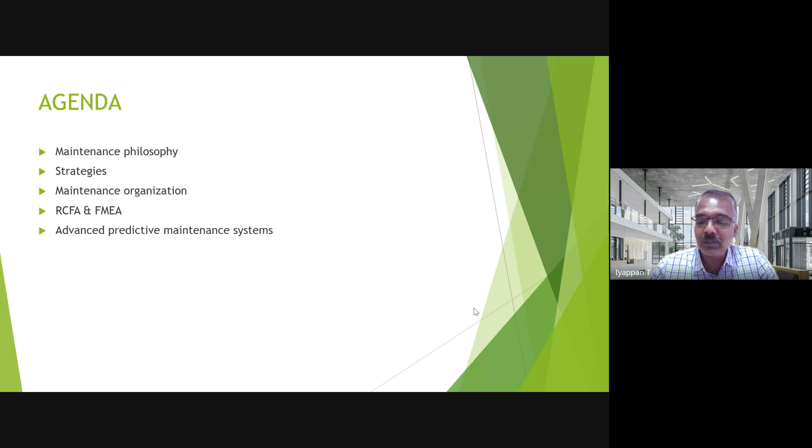And in this digitalization era, we have so many advancements in technologies, so that has also impacted the maintenance systems. So we have this advanced predictive maintenance systems. I'll continue with the presentation.

In case of any questions, I request our students to keep it, and then at the end I will answer all your questions. So what is maintenance?

Basically, maintenance is to upkeep the healthy condition of any machinery or rotating equipment, or for that matter any equipment. This is broadly divided into three categories.

Inspection, to know what is the actual state of that equipment or machinery. And then service is to maintain some parts, replace some small parts, repair something, or do some lubrication, which is also a kind of service to keep the healthy condition.

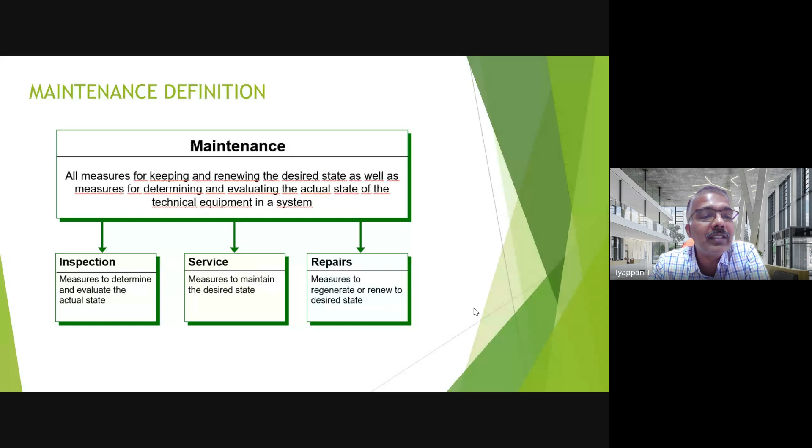After a certain period of time, we might have to do a major replacement or a shutdown to renew the lifetime of that equipment, to enhance the lifetime. So maintenance in general is inspection, service and repairs.

So how it is done? For example, if you have any equipment in the industry, then first thing is after operating it for some time, we need to inspect it.

There are two kinds of inspections, online and offline. During working of the machinery we can measure some parameters, and sometimes we take the machine to a shut-off condition and then measure some parameters, do some inspections. We will cover those details in the later slides. So this forms the part of inspection.

Then after inspection, we find some deviation or abnormalities. Then we have to plan for the correction. So planning is the first step. Planning includes manpower planning, the resources, as well as the spare parts, then the timeline of when we will do that job. So this is the planning task.

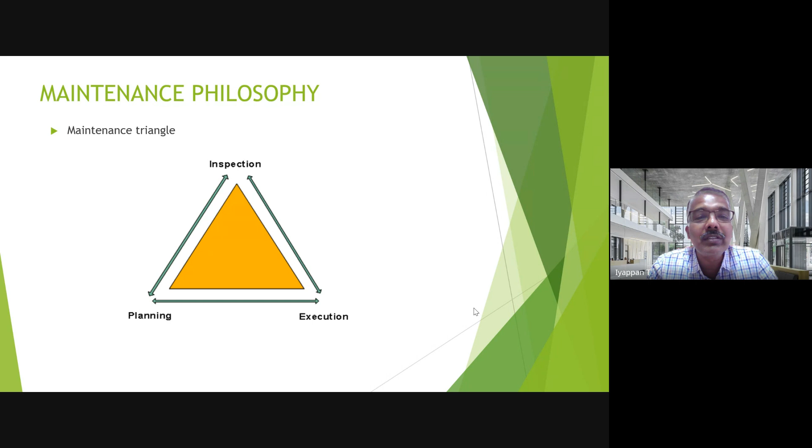Then third comes the real execution. We execute that planned activity. So why we put an arrow mark back and forth is because all these three activities, three functions, are interrelated. That means it cannot work in compartmental modes. One has to be connected with others. So the engineers assigned with the planning task have to coordinate with the inspectors as well as the execution engineers. So maintenance is always said to be in a triangle covering broadly these three functions.

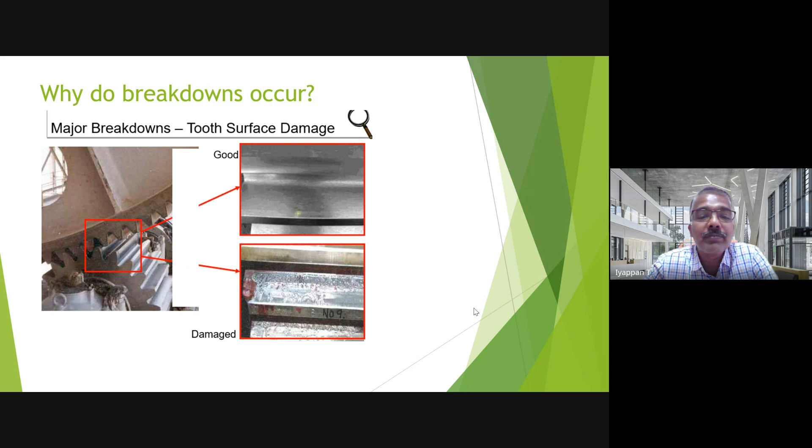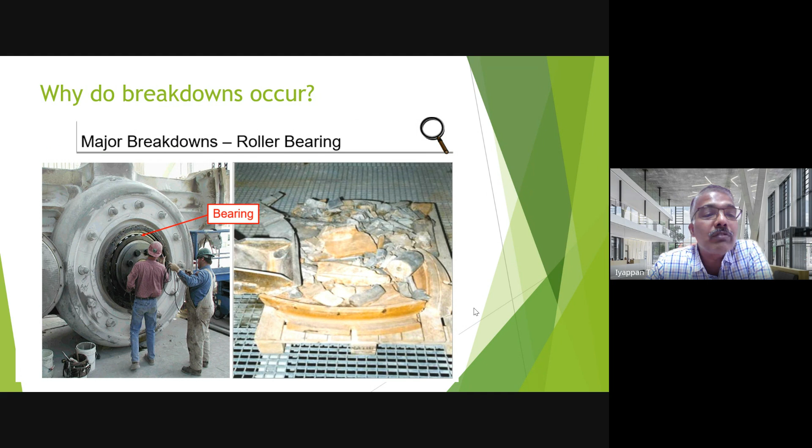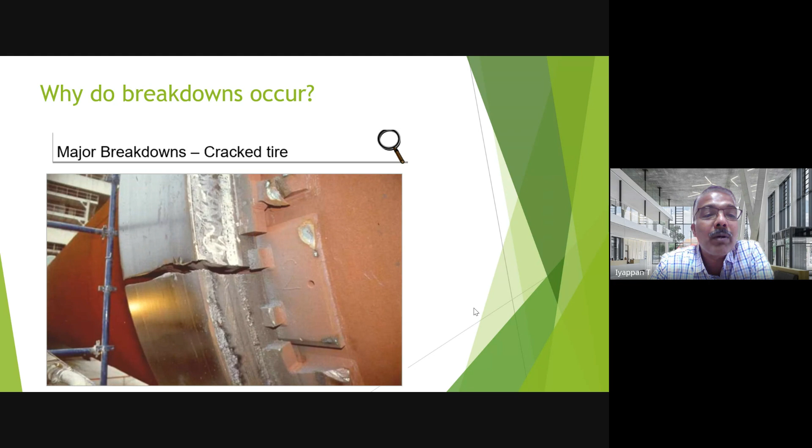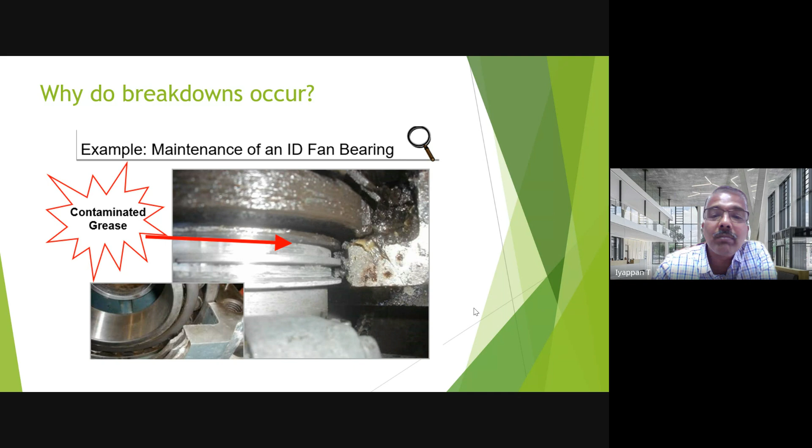Here for some bearings, we see the grease is contaminated. The ID fan, induced draft fan, is a very common equipment used in all process industries. If you use contaminated grease, the bearing could fail, or the contamination could happen from dust. This picture shows a bearing without adequate lubricant, with no sufficient lubrication. So what does it mean?

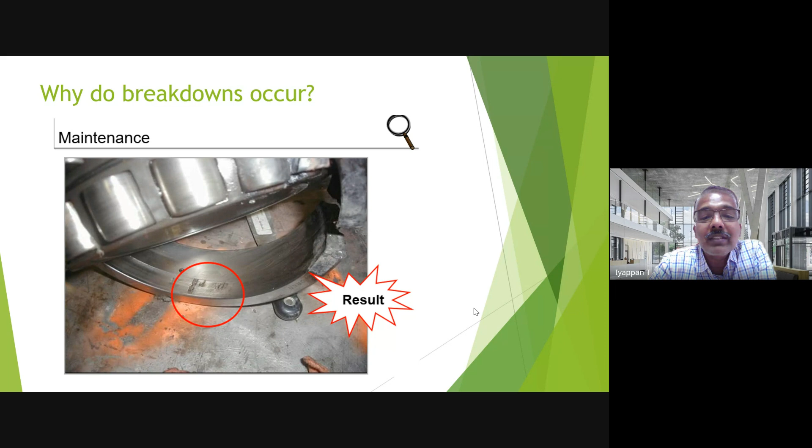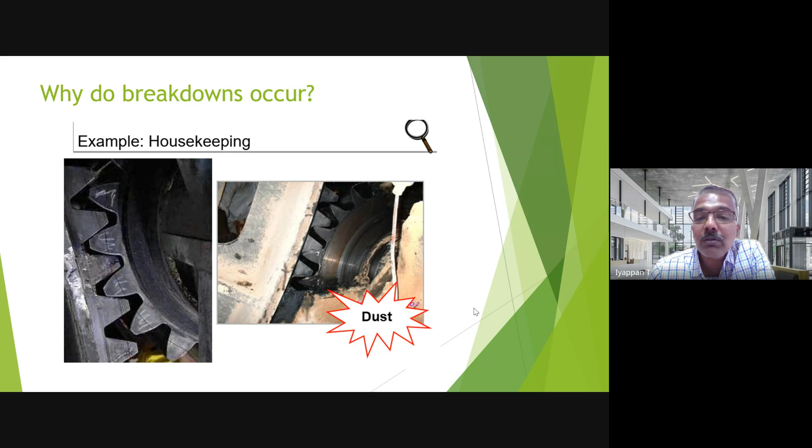Poor housekeeping also leads to equipment failures. So when you think about why these breakdowns occur, we get an answer. There are four broad categories. Why do such machineries, which are well designed for a certain lifetime, why does it fail?

First one is about design and manufacturing of equipment. Many times the problem could happen due to a poor design or even lack of quality control during manufacturing, causing it to fail, like what we have seen in the previous few photographs. Or if you are operating the equipment beyond its designed limit, basically overloading it, operating beyond the factor of safety, then also it could fail.

But today's agenda is not about these first two things. We are not going to discuss much about design and operating limits. We focus clearly on maintenance.

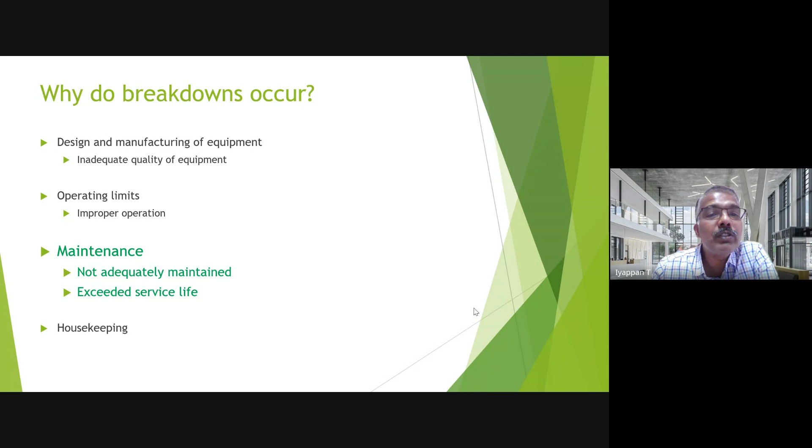Machine breakdowns occur based on statistics. More than 60% of the cases are related to maintenance. So the other two categories broadly account for less than 40%. Mainly maintenance, or lack of adequate maintenance, leads to more than 60% of equipment failures in any plant or industry. Housekeeping is also considered part of maintenance. So these two categories severely influence the equipment breakdowns we have seen in previous slides.

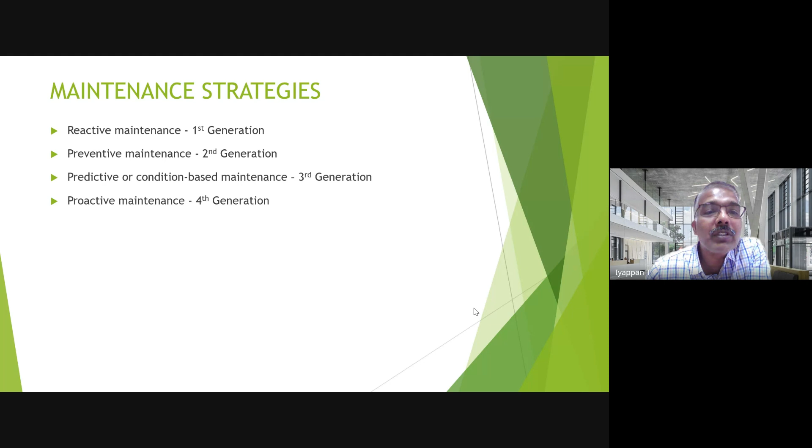So we see in the subsequent slides why. As the name suggests, reactive means you have a machine and you run it until it fails. You don't even bother to go inspect it. It's a firefighting approach. One day the machine fails, then you get a call, go and repair it, replace the parts that are broken or worn out.

When you talk about maintenance, you should be very clear about planned stoppage versus unplanned stoppage. Planned stoppage means we stop the plant or equipment to do maintenance, repair, or service - this is not counted as a breakdown or failure. We plan this when market demand is less, or when we have sufficient storage in the warehouse. Mostly we focus on unplanned stoppages, which are termed breakdowns.

If you follow this reactive maintenance strategy, you will end up with unplanned stoppages when your market demand is at a high peak season. Labor costs may increase because breakdowns may happen anytime and you may have to attend to them immediately, so you cannot plan the workforce. Repair and replacement costs would be higher because you would not know what component of the machine will fail - it will be a surprise. So you may have to purchase that part if you don't have it readily in inventory.

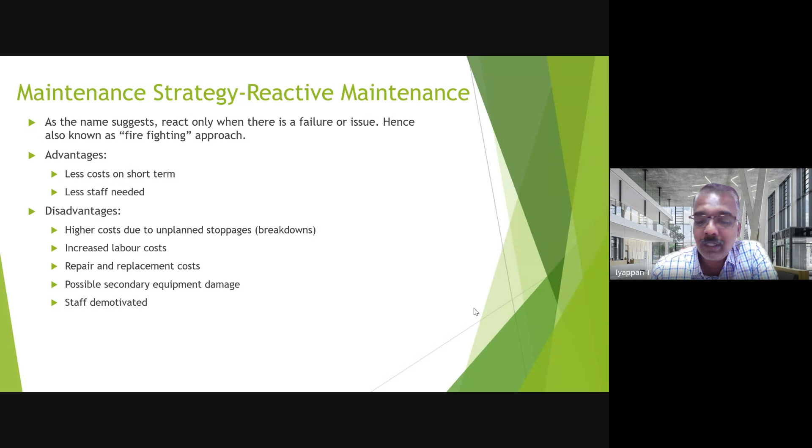So reactive maintenance is never ever recommended in these days. It was a very olden day structure. Why I bring it up here is so you should know the generation, how it has transformed.

Most plants or industries have started following preventive maintenance for several decades now. Preventive maintenance means we do some inspections in a preventive way. We stop the equipment on a planned timeline, and then we check the condition of the equipment. I have some examples which I will show later.

So we check the equipment for certain conditions. If parts have to be changed, then we replace those parts time to time. We schedule it. For example, if there is some equipment which needs an inspection every month, then every month we stop it for 8 hours, probably on a day where we don't have a big market season or where it is not affecting your business plan, and then we do a repair.

This has got certain advantages over reactive maintenance, and you can definitely reduce your unplanned downtime because the equipment will not give you any surprises. It will give you an early indication of what kind of failure is going to come in the next few months, next year, or in the next few days, so you can plan your repair accordingly. So preventive maintenance is a much better option than a reactive one.

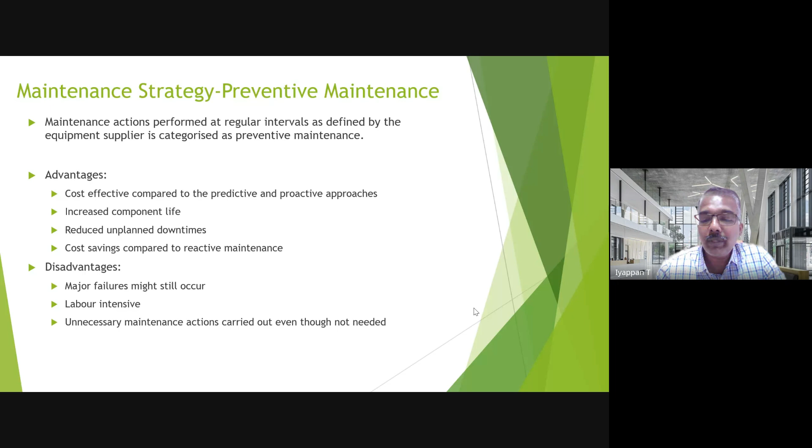So this is how you have to think about the strategy to balance it. If you are thinking of removing all the issues at a time, then it may land up in higher cost. So there comes budgeting - maintenance budgeting - which is altogether a different subject. If you want to optimize your maintenance budget, you try to attend to the issue which is highly critical. For example, if the issue will damage the equipment or stop your production, you may have to attend to that highly critical issue first and then control the cost. We may postpone certain non-critical issues to a later date. So this is how we have to balance between the available manpower as well as the cost budgeting.

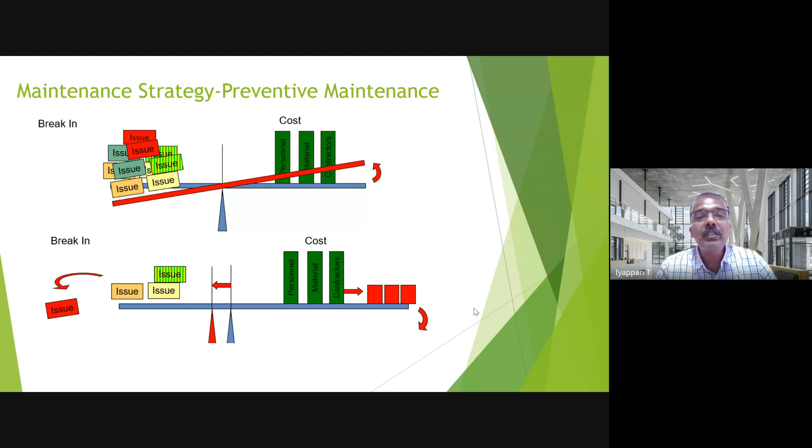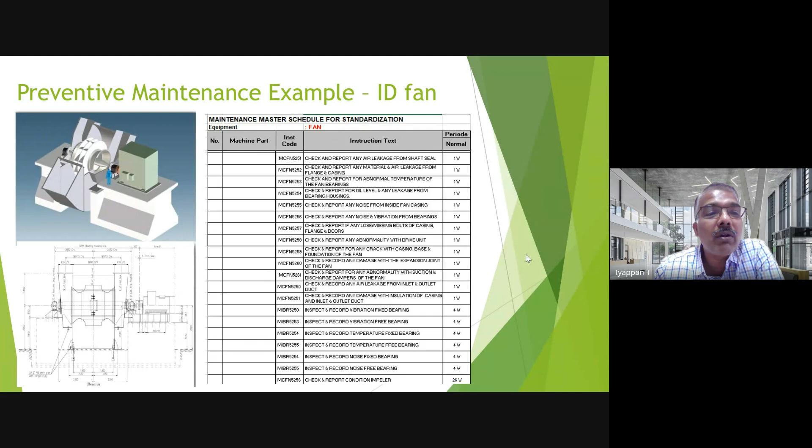so that you don't have a failure or a surprise. But in this case you don't go by such time-based replacements, we go with condition-based replacement. So how do you do that? You measure the thickness of the impeller blade or the shaft, and then you decide, if it's still within the limit, you continue to operate for another 2 or 3 years. This definitely results in less maintenance cost compared to reactive and preventive maintenance, so there will be cost savings as well.

There are some disadvantages, not disadvantages, but something I have to mention here. In order to deploy this kind of predictive maintenance, you might have to spend some investment upfront for purchasing the sensors, implementing these tools and measurement systems, and also the maintenance engineer and team has to be given proper training on how to use these tools and the analytical platform available in the tool to come to a decision-making process.

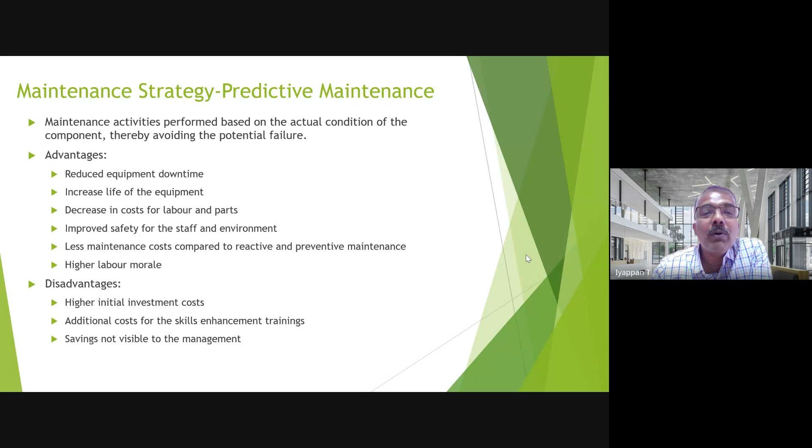So this is about predictive maintenance. Then last is the proactive maintenance system, which is what we call root cause failure analysis and FMEA. This mainly focuses on the maintenance management system. Now, so far we've been talking about deploying certain strategies, and now you have an overall view of how to make a maintenance system. For this we need to develop the reliability-centered maintenance management process within the organization, and with this we can attain maintenance excellence.

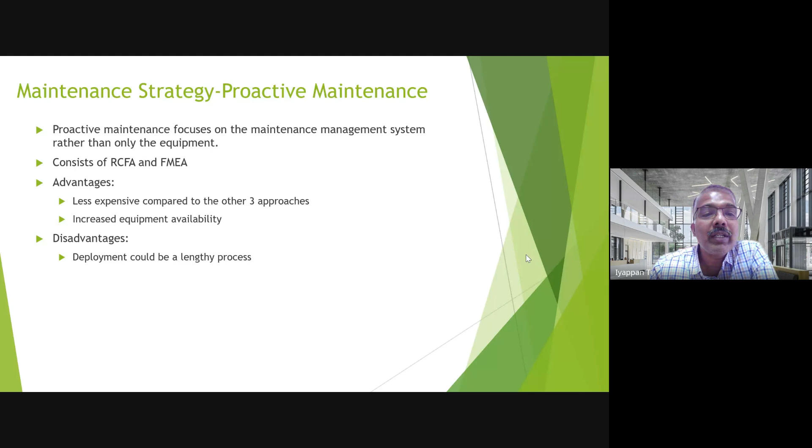So when you go back to condition-based maintenance, what tools can you utilize? The topmost one is vibration analysis, mainly used for gearboxes, fans, any rotating equipment. You can use this vibration analysis tool to measure the vibrations when the plant is functioning or when the equipment is working. The first step is to collect the data, then you prepare the analysis of the data, then interpret the results, then make a conclusion.

What kind of action would I take if the vibration is high? Vibration analysis is a very interesting subject, but it's also very lengthy. If you talk about any rotating equipment, then you have different frequencies and spectra.

1 into RPM, 2 into RPM, like that. So 1 into RPM always says about unbalance in your rotating equipment. And 2 into RPM talks about the mechanical looseness or alignment disturbances.

You measure vibrations in 3 directions: axial, vertical, and horizontal. Horizontal vibrations mean something. If your vibration is high in the axial direction, it means something else. Plenty of such tools are available in the market, in the industry, and you can utilize these tools to predict the condition of your rotating equipment.

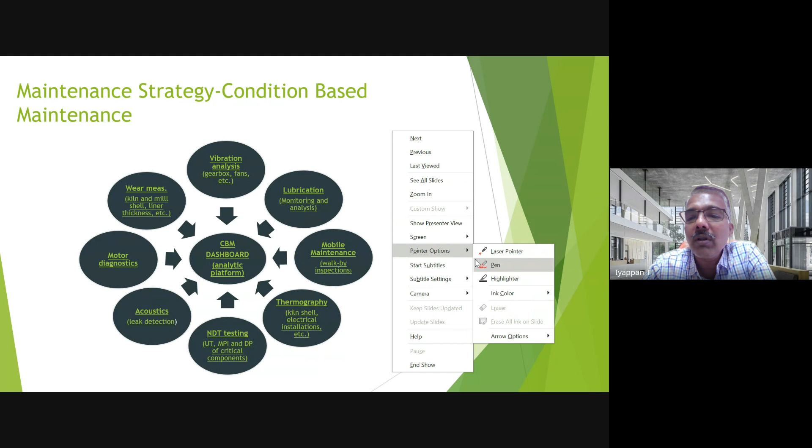Then comes the lubrication monitoring and analysis. If you have a big gearbox, say filled with 5 kl or 7 kl of oil, you cannot change such a big quantity of oil so frequently. It will be time consuming and expensive. So what we do is take out some samples and test it in a laboratory to see the condition of the oil.

We also look for iron, ferrous and non-ferrous particles in that analysis. The oil condition not only tells us about oil replacement, but also gives a signal of the equipment condition, which component is wearing. For example, if you find a lot of silicon in your oil analysis, it indicates dust or sand ingress into your gearbox or equipment. If iron particles are highly concentrated, it indicates that some gear parts are wearing out. So it gives an indication, and you can plan for some maintenance.

Then on this side, wear measurement. Like original thickness — whenever you install any equipment, you have an original thickness you need to record first. You can get it from the drawings, or physically measure it as soon as the equipment is new. Then after 6 months, after 1 year, or every month, you make a maintenance downtime day and measure it.

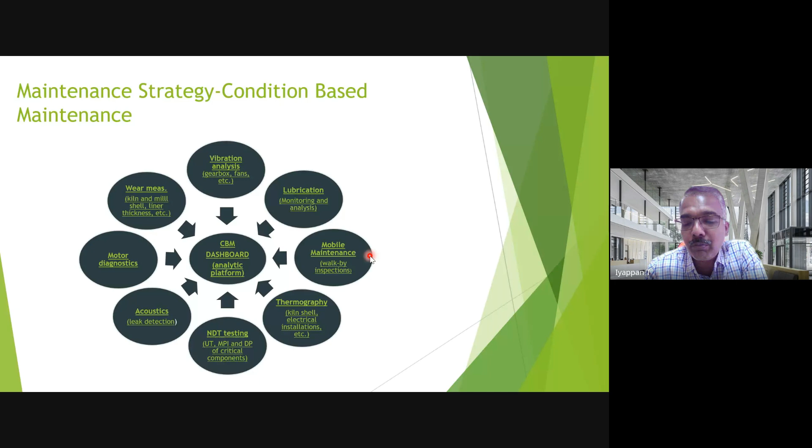I have summarized here the typical techniques we generally use, their purpose, and what criteria we measure. Vibration measurement and monitoring technique can be used only for rotating equipment. If you have static equipment, this of course will not help you much. So for gearboxes, motors, fans, we can use vibration analytical tools.

It is also used to check misalignment of rotor, impellers, or broken gear teeth, defective bearings, all of this. So vibration tools cover almost 50% of the problems you have in any big industries. Oil analysis comes next — here too you take an analysis for wear and tear, and in transformers you can use dissolved gas content and other water content.

You can check this. There are certain national accredited laboratories available worldwide in several places, in almost every city. So you can have a sample sent to them and get it tested.

Most important is we take the sample from the same point every time, and then we ask the agency performing the analysis to give us the trending, so that we know what the sample was when tested six months back and what it is now, so we can come to some conclusion. Individual tests do not reveal much, so we need trending or correlation with what was there before and now.

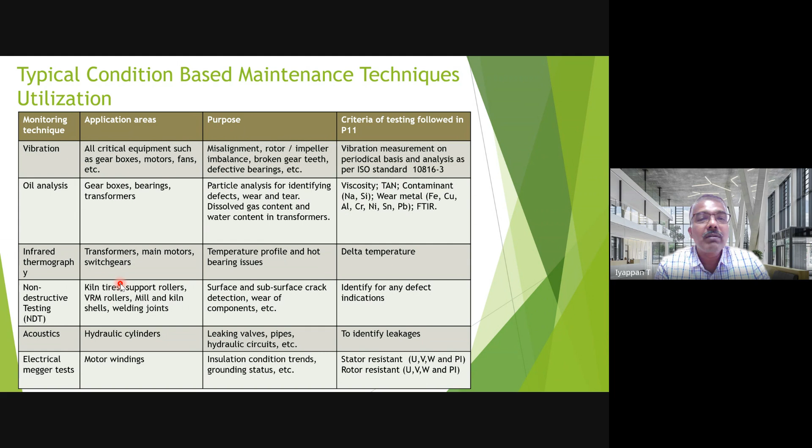Non-destructive testing, I've already talked about. Ultrasonic testing is widely used in maintenance to find out surface or subsurface cracks, and to some extent it can predict wear also. Acoustic testing is only used in hydraulic systems to detect leakages. Electrical megger tests, probably you're all well aware, are used to check winding conditions. So these are all the tools available in the market to improve your maintenance techniques.

So this is a small animation of ultrasound testing, how it works. The waves are passed from here. If they pass through, you get a full graph, meaning no crack. If there is a crack, the waves are reflected back from it, indicating a crack. So here is a crack, and the last one is shorter because it's a back wall echo. This is a very common tool available.

You can use this for testing any kind of steel. Only thing to note is the temperature should be at ambient condition when testing any steel part, otherwise it will be misleading and the transducers or probes cannot work properly. This is a standard tool available in the market, and any industry with a maintenance department will have this tool to check for cracks in steel components.

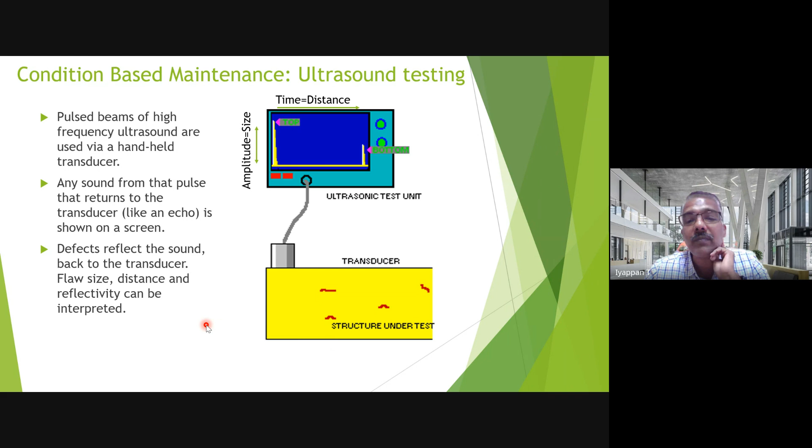So this is how it works. If you don't have a crack, the wave travels and is reflected from the back wall. If there is a crack, it gets reflected from that crack, giving you this kind of interpretation. This is a very useful tool you can use for your maintenance needs.

When you have a stoppage, for example with a gearbox shaft or fan shaft, you can use this to check for any cracks or inherent defects. If there's a small crack inside, the fan or gearbox may still be operating, but one fine morning the gearbox will fail, the shaft may break into two pieces or the crack may extend, and then you won't be able to operate the gearbox. Then we switch to reactive maintenance. If you don't predict the failure, the gearbox automatically fails, it gives you a call and you stop the industry, then repair it. This means you're switching back to reactive maintenance, which is not at all recommended.

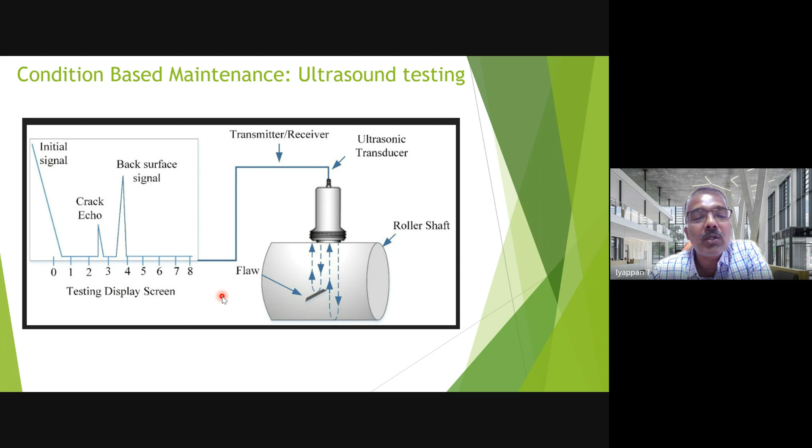So we use this kind of technology and tools to improve our maintenance system.

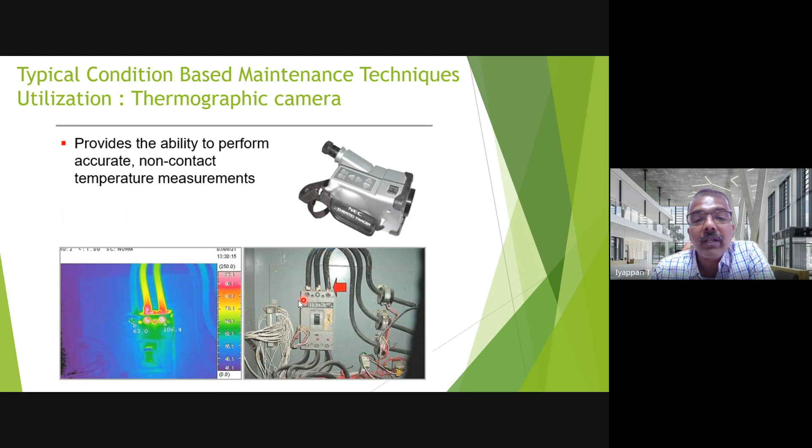This is about infrared thermographic cameras. We can see the red spot here, which shows there are probably some terminal loose connections leading to this high temperature. So the action we take is to switch off, isolate the power supply, then ask a qualified electrical technician to check these terminal boxes for proper crimping and tightening. This is how we avoid failures, and it all helps improve your maintenance systems.

So finally, we talked about reactive maintenance not being recommended, but there are three other types. You might ask, which one should we follow? Here is the answer: a standard maintenance management system should be a mix of all three. You employ preventive maintenance at a large scale, around 70%, with full coverage, then predictive and proactive maintenance to a certain extent.

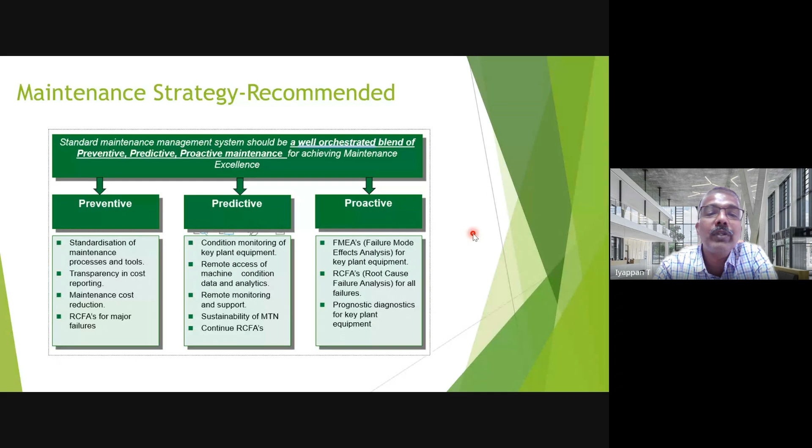Why? Because these measurement tools and sensors cannot be used on all equipment. If you have a hundred pieces of equipment, you cannot use this for all of them. But a preventive maintenance system can be used for all, whether it's static equipment, rotating equipment, heavily loaded or slightly loaded. Predictive maintenance depends on the tools available, the condition monitoring team in your industry, and the access and expertise you have. So I would like to say mix all these three, and then you can aim for achieving maintenance excellence in your plant.

So you should have planners, an electrical planner, a mechanical planner, and based on the process, you should also have a process engineer. There should be a planning team, and also a team to execute the job. This team will work in the field to do the actual replacement of the spare part.

Then this team will plan the activity, meaning they plan the resources, plan when it will be done, and also arrange for spare parts. And this team will go to the site and do the inspection, then communicate with the planning team on the current condition of the equipment with respect to the original design or drawings, and what was the deviation.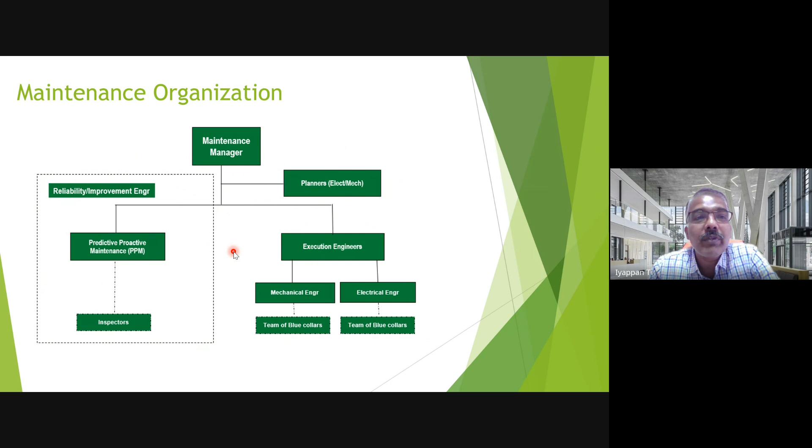So they will predict this. This inspection team gives feedback to the planner to plan the job, and this team will execute, then give feedback. So we call this the reliability or improvement engineering function. This team is the execution function, basically the site engineers, and this is the planning function. All of them are under a maintenance manager. If you have this setup, the system we talk about works well.

So how did this organization develop, what are the factors that led to it? Like we said, we are improving the efficiency of the people, so we focus on these three functions: inspection, planning, and execution.

Moving from manual management, that's what I said, the Excel sheet management was very old. Now we use SAP or Maximo, these computer-based maintenance management systems, which reduce a lot of your paperwork. Directly you get a work order generated on the system, you execute the task, and mostly it is done in a very systematic way. This saves a lot of time, so you can focus on value-added activities rather than sitting and filling out sheets.

And maintenance cost management. Cost management mainly means every management would like to have a reduction in cost. So we move from a pure reactive to a predictive or proactive mix approach. Our overall target is to have a lower overall maintenance cost. When we talk about maintenance costs, we have three costs: the maintenance team's cost, contractor's cost, and spare parts cost. All three are considered as maintenance cost spending.

Then reliability management, increasing the equipment life cycle. When you talk about lifetime, there are several lifetimes discussed. One is the design lifetime. Another is the guaranteed lifetime. The third one is the actual lifetime.

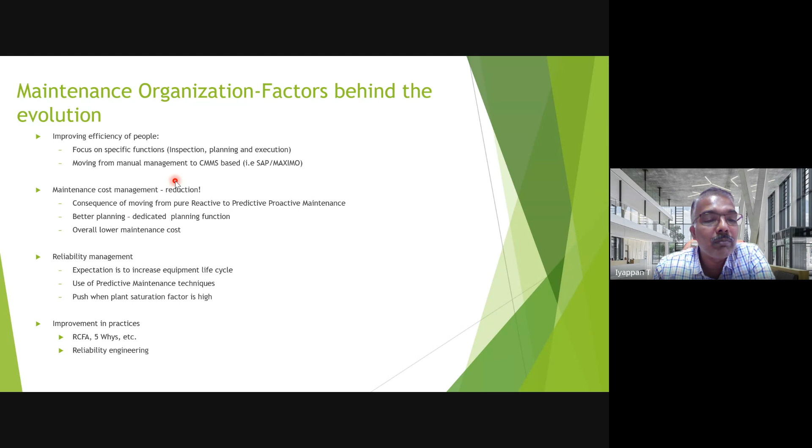So how to improve these practices? RCFA, root cause failure analysis, 5 why analysis. You keep asking why until you drill down to the bottom of the problem. So all this is about reliability engineering.

So what are the organization's roles and responsibilities? We develop the preventive maintenance plan. That's the Excel sheet which I have shown before. I showed an example for just one equipment, a small equipment, the ID fan. But if you are in an industry where you have about 500, 600 equipment, you have to plan for all of that.

So the Excel sheet task would not work nowadays. That's why we move to computerized management systems, where we can punch all the data, then you get all this checklist. And then based on this, if you run the date, for example, today is 7th.

So say your week starts from Monday. So 3rd February to 7th February, what are all the tasks? If you go into the computer system and check, you will get all the activities you need to do from Monday until Friday. So you do that, and over the weekend you punch in all the feedback. Then automatically the next week's task starts from next Monday.

And then the lubrication plan. Within our industry, we analyzed the failures for 10 years. We found most of the mechanical equipment failures, I would say more than 30%, are related to lubrication failures. So many times lubrication has played a vital role. So the lubrication plan is very important to keep the equipment in healthy condition.

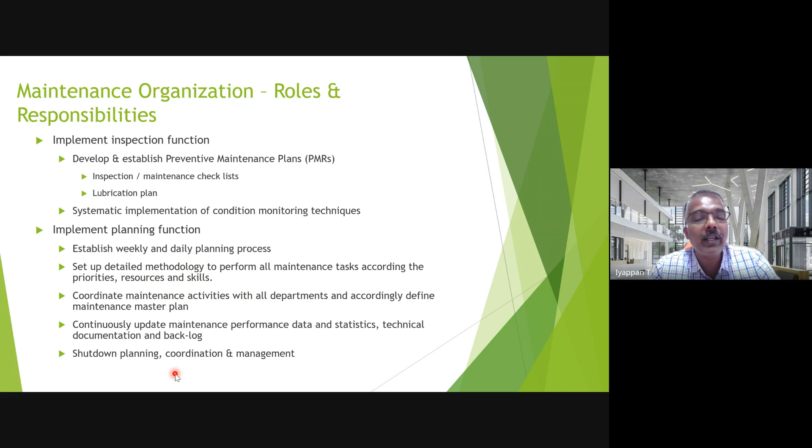So FMEA and root cause, I have a different slide, we will go to that later. Standard maintenance procedure - this is developed based on your own experience or with OEM support. You can develop this to improve maintenance practices.

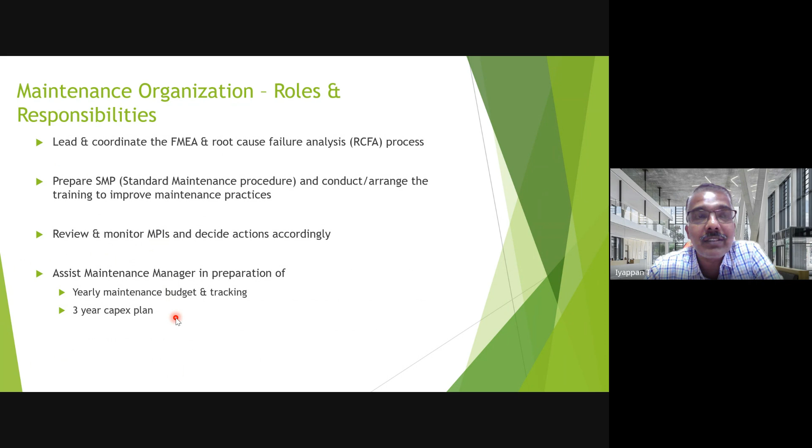So there are monthly meetings. The maintenance manager or anybody would run the monthly meeting to monitor the monthly maintenance performance index, how it is performing, and decide actions accordingly. Budgeting is key - if you have sufficient budget, you can plan and execute your maintenance as planned. Otherwise, you will have a problem. So it is always suggested you make a 3-year capital expenditure plan so that you are provided with sufficient funds to execute the tasks.

The advantage of using CMMS is, for example, if you are doing different maintenance at different times on different equipment, once you want the maintenance history of any equipment, it is easy to extract and drill down if you are using a computerized system.

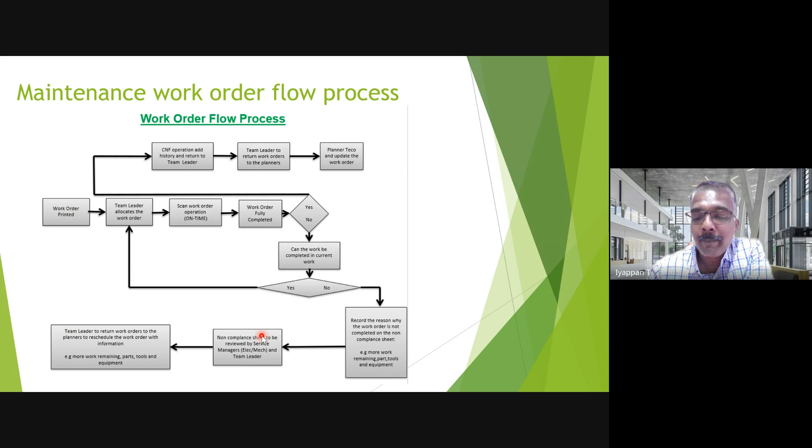Now we talk about root cause failure analysis. RCFA is a very, very powerful tool. Why? Because it is a step-by-step method. For example, if you have a breakdown - some breakdowns we have seen in the photos I showed - that is the ultimate result, the failure. But why has it failed?

Then there is a progression of actions leading to this failure. So you sit as a team - RCFAs are never done alone. You sit as a team of people, maybe process engineer, maintenance engineer, mechanical, electrical engineer, all of them who are responsible for that area, for that equipment or machinery. And then you sit together and establish the chronology of the different happenings that took place before the failure. Then you analyze, discuss, refer to the drawings, data, specifications, and different measurement readings or parameters that you have.

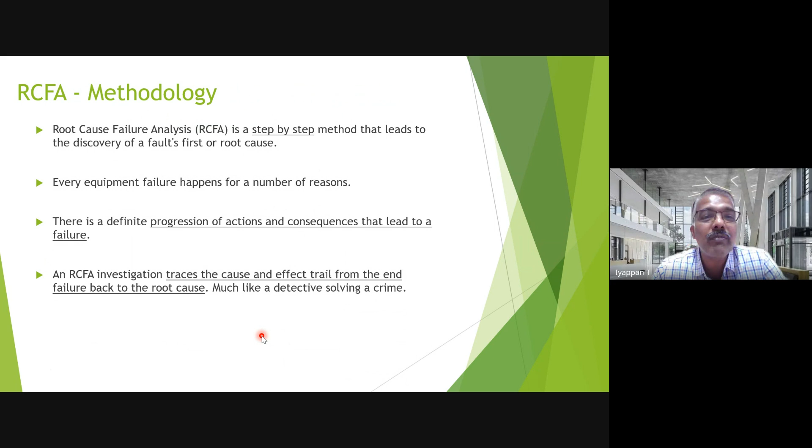Then you come to a conclusion: okay, this was the root cause which has led to this failure finally. Then how to eliminate the root cause? You make some action plan and implement it. That's why when you do a successful RCFA, the same kind of failure should not repeat again. If you have a similar failure repeating again and again, that means either you don't have RCFA in your organization, or your RCFA is not effective. You may have to do it differently.

So this is about that, just like what I said. So first you use all the evidences, and then you construct a fault tree with all the progressive actions. Then it is a step-by-step process. Then you finally come to the sequence of process, and then you make a conclusion: okay, this was the problem.

For example, if a shaft is sheared, then you decide that somebody has unknowingly used welding with a high temperature, and the heat affected zone has caused a crack in the welding. So what action could you take? You educate your team not to do any kind of welding. You have to go with a different kind of repair solution, or replace the shaft at the moment if you don't have a choice. So you list down short term, long term, all the corrective actions which you propose. Then you assign somebody to execute that task and then close the case.

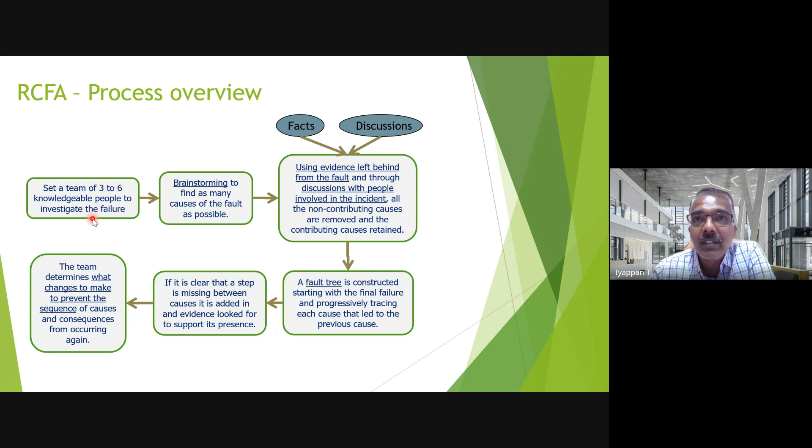So this is how the RCFA works. If you have a breakdown, you do a proper RCFA, then you implement the action, then make sure that same problem does not repeat for at least next 5 years. That means then your RCFA process is successful. So the conclusion is RCFA is to prevent the reoccurrence of failure.

Sometimes it may happen that the breakdown is happening due to a design problem, so then in that case a redesign is necessary. But as I said before, most of the time, if you analyze any breakdown, more than 70% of the cases are relating to lack of adequate maintenance or lubrication or timely replacement of parts or overloading, and not a design problem. But it is a general thinking that when any equipment fails, everybody jumps to look at the design parameters and say the equipment is under designed or not designed for this particular application. But in practice, it doesn't happen like that. Statistics don't say that at least.

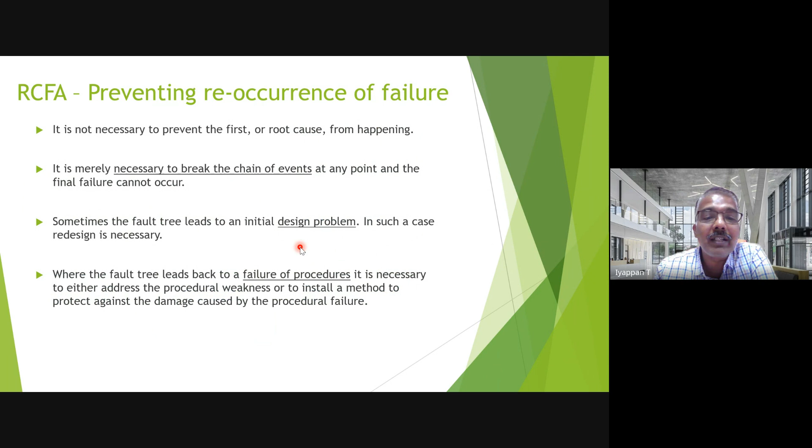FMEA is slightly different. FMEA is failure modes and effect analysis. We do the FMEA before even the stoppage occurs. When you get a new equipment or machinery, then you study the functioning of that equipment or system. Then you list down - you imagine, by imagination, what all the failures could happen. If there is a gearbox, you can think the gear tooth surface may crack, the bearings may fail, or the gearbox seal may be broken.

So you assume certain failure modes, then you quantify the effects - if these failures happen, what will happen? Then you list down the causes. There is a detailed working sheet available for how to make this risk priority index. Then you also plan some actions for how to prevent these failures from happening. Then you implement that into your preventive maintenance system. So the FMEA we do before the failure.

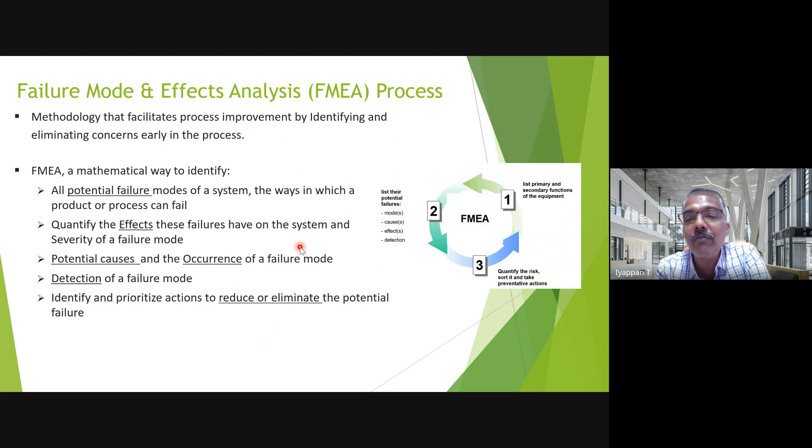So here is the conclusion: FMEA is prevention, RCFA is a reaction. RCFA we do after the failure to prevent the reoccurrence of the failure. But FMEA is a very advanced one, you need a lot of expertise to do that. When you are purchasing a new machinery, you may not be having so much knowledge at that point of time. So FMEA is a challenging task to do, I would say, because you need to anticipate the potential failures, and even if you miss one of it, then you will still have a failure. That's why we have RCFA. So these both are two powerful tools which will definitely help a lot to improve your maintenance systems.

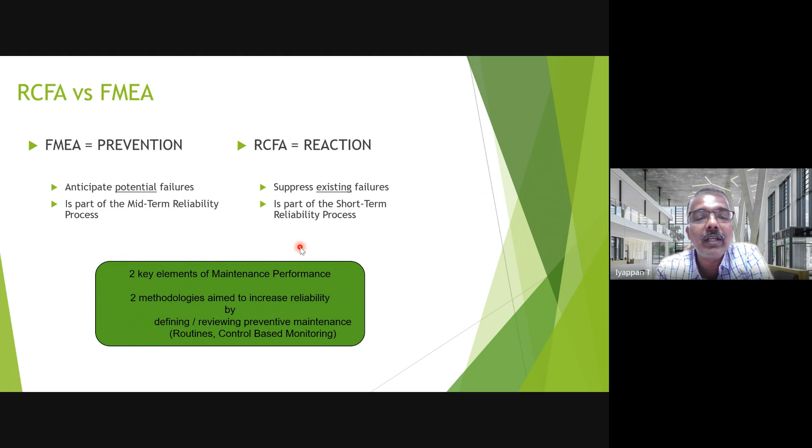It is analyzed by an expert. Then it is transformed into a work order to the computerized system. Then your plant team engineer goes and repairs or does the service.

This can be anywhere. You set up the sensor and then transport the data via the cloud using secure internet connections. The server can be in Germany, in the US, or in Singapore, anywhere. The analytical team can also sit anywhere, and your plant can be in any remote area.

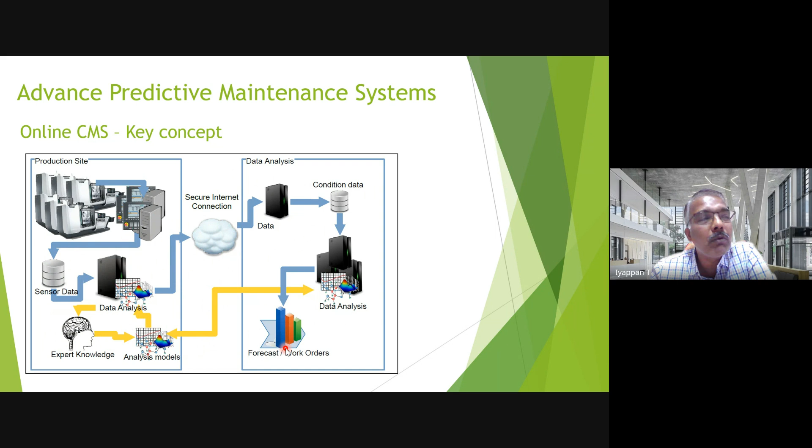In fact, we have been employing mostly these tools in the last 5 years for our plants. So with this, you get trending also.

Then you can also predict the failure. So this type of system is available.

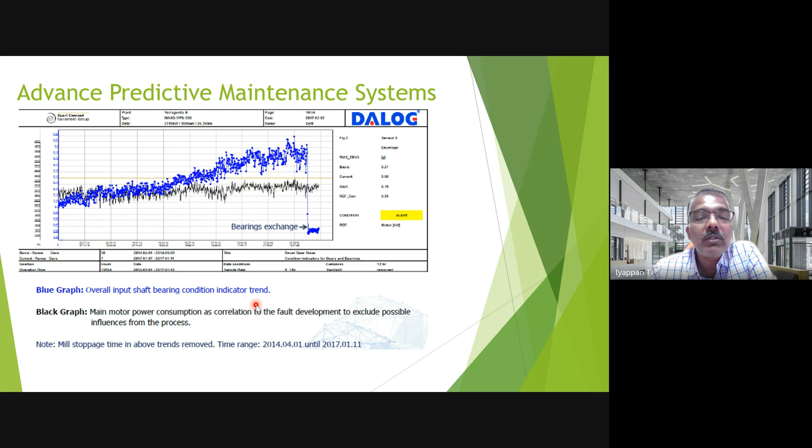24/7, it is monitored by the algorithm. Abnormal trends are reported to the expert, who analyzes the abnormal signals. If it is a false signal, he ignores it; if it is a real abnormality, then he alerts the user.

So this is a much more advanced system, but many industries have already upgraded to this kind of maintenance system.

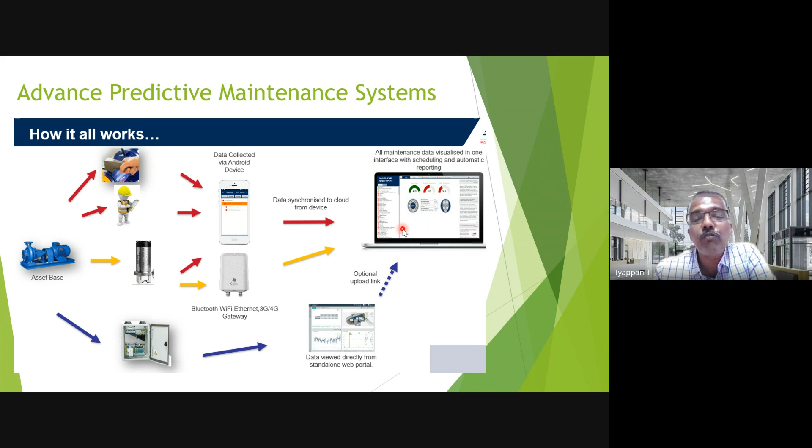In conclusion, I would say digitalization has transformed plant maintenance practice. We started with reactive maintenance, which is never recommended. Then time-based, fix it before it fails, preventive maintenance - it has many advantages, some disadvantages too. Then predictive, which is condition-based; we use certain condition monitoring tools to find out the condition.

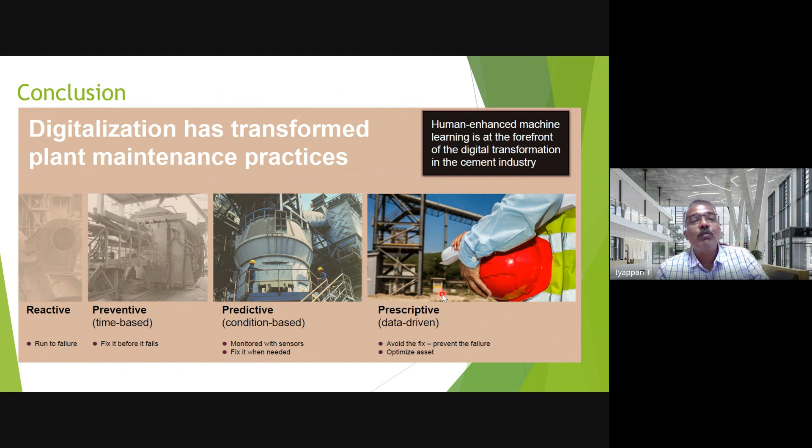Then prescriptive is data-driven. The last few slides which I showed, the data interpretation will give you a signal when it is going to fail. So you can avoid the fix, prevent the failure, and have better optimization of your asset utilization. I think that's all.